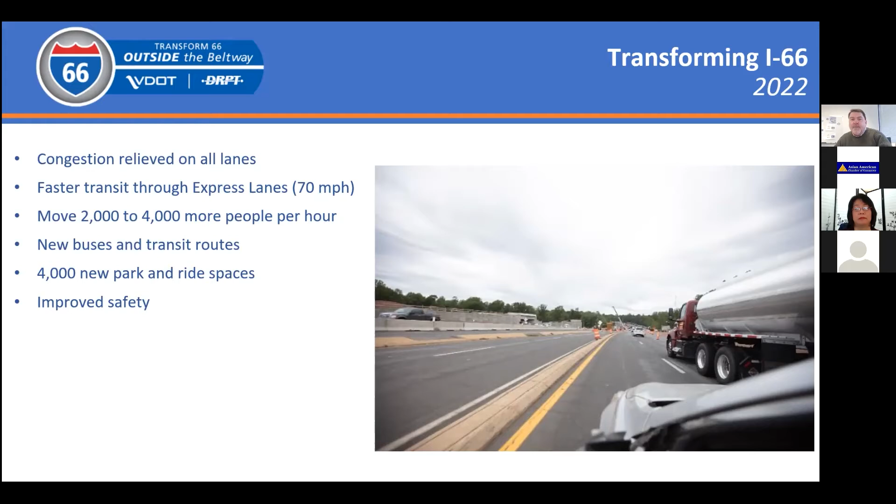Our project, to drill down a little more specifically, we are constructing 2 express lanes in each direction from Route 29 in Gainesville all the way to the Capitol Beltway. When those express lanes open late next year, anybody carpooling, or what we call HOV3, meaning 3 or more people in the car, and buses and transit will travel for free.

Those who are not HOV using the express lanes will pay a toll, and those tolls are based on congestion so we can keep the traffic flowing. If you're familiar with the express lanes on the 495, the Beltway, or on I-395 or I-95, it's very similar in terms of how the tolling will be placed.

There will also be 3 regular lanes in each direction with no tolls, and there are certain places where there will be connections from ramp to ramp between interchanges, meaning that we'll be reducing the amount of times cars need to switch lanes to get from point A to point B.

And there are safety improvements going on at many of the interchanges. For example, improvements in some of the turning radiuses at interchanges to make getting on and off the highway safer.

There's also a lot of new transit service that's being planned as part of the project. So OmniRide, which is the Prince William County transit service, is adding more routes that'll be accessing those new park and ride facilities out in Gainesville and Manassas.

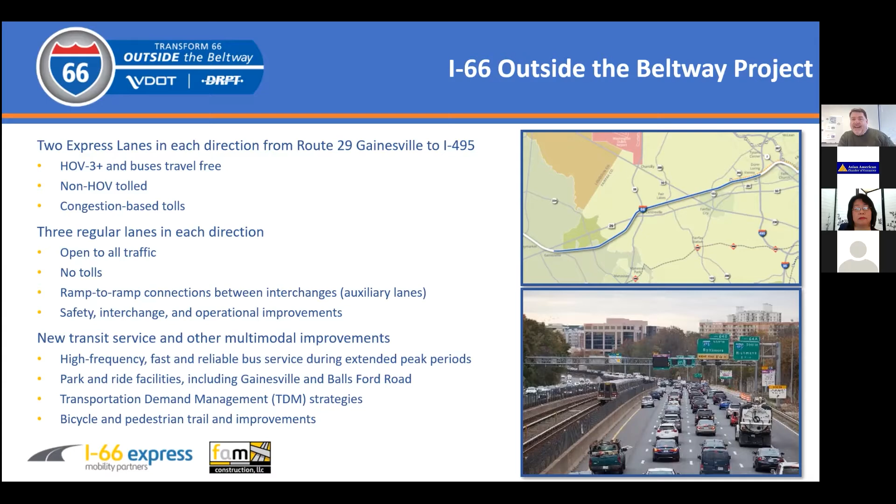And we are building 11 miles of bicycle and pedestrian trail, which we call a shared use path, that is connecting to existing and future trails in Fairfax and Prince William County. So really giving people more choices for them to get from one place to another. We can go to the next slide.

So some people might ask, who is I-66 Express Mobility Partners? We are VDOT's partner on this project. A public-private partnership is where private investment is able to address a public need. So in this case, the project is being delivered at no cost or no taxpayer cost to the Commonwealth of Virginia, but providing this significant improvement, which will relieve traffic congestion.

Overall, the project is worth about $3.5 billion. 2.3 billion of that is for the actual construction of the highway. And as I've mentioned before, transit will be expanding, so toll revenue is also funding the expansion of transit options for people over the lifetime of the contract.

And when we broke ground on the project in 2017, we provided just under 600 million to VDOT and Northern Virginia to address other transportation needs along the I-66 corridor. Our view with that investment was the more we can improve and relieve congestion adjacent to I-66, the better I-66 will perform. So Fairfax County and Prince William County are undertaking projects right now with those funds.

Things like expand the Balls Ford Road corridor in Manassas. Fairfax County just broke ground on a new parking garage at Monument Drive. VRE is using some of those funds to enhance and improve the Manassas rail station. OmniRide, the transit service in Prince William County, used their funds to build a new Western maintenance facility to better serve the commuters along I-66.

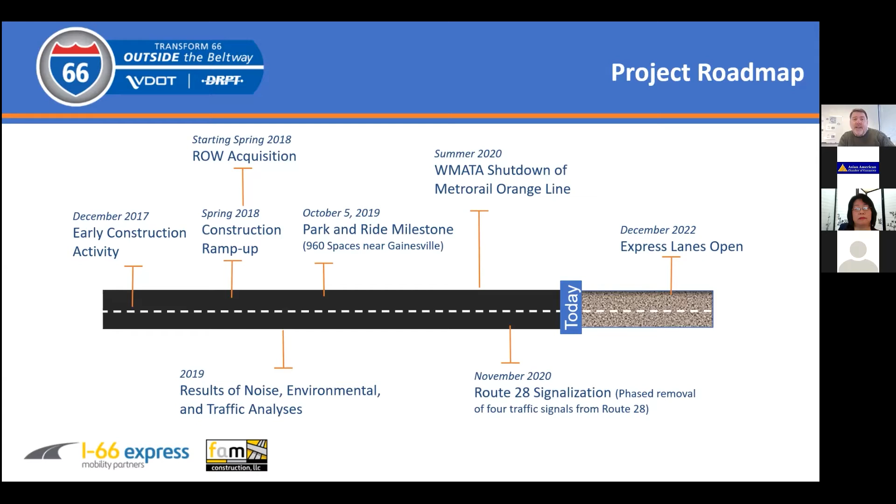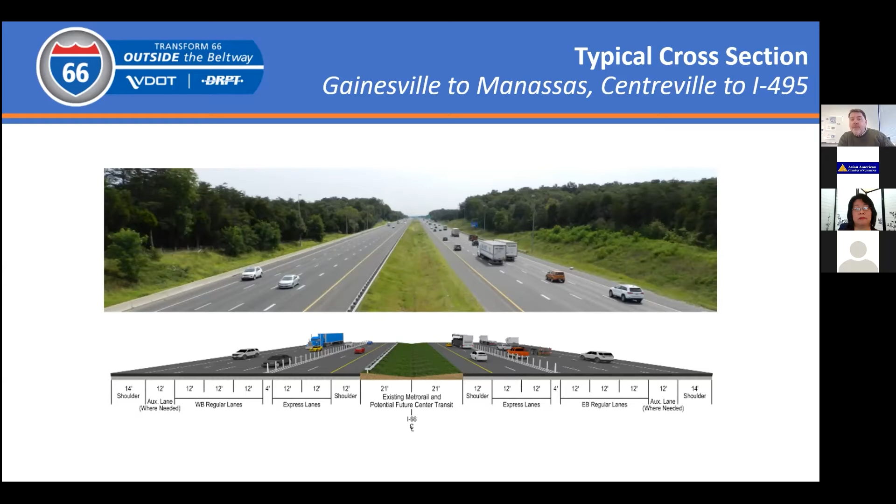In the area from Manassas to Centreville, you'll see there is not a median reserved because we're space constrained there. But in the future, if transit does expand out west, we would have to re-engineer this section of the highway to accommodate whatever transit might take place.

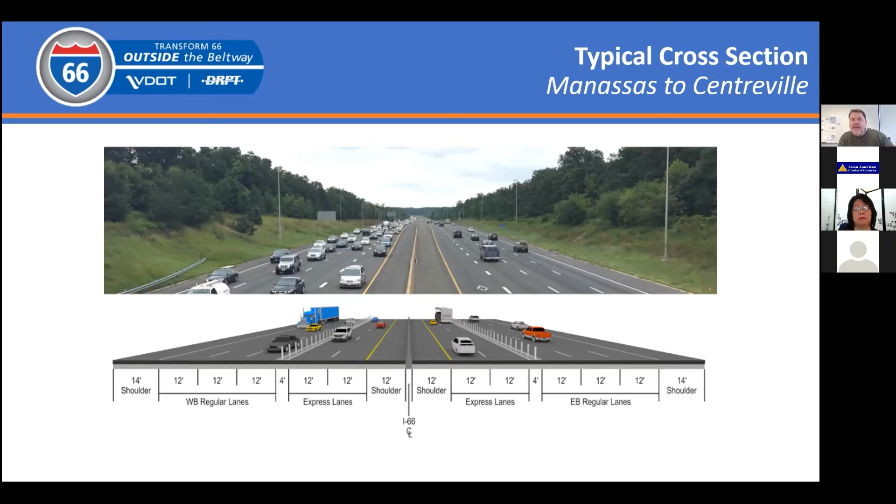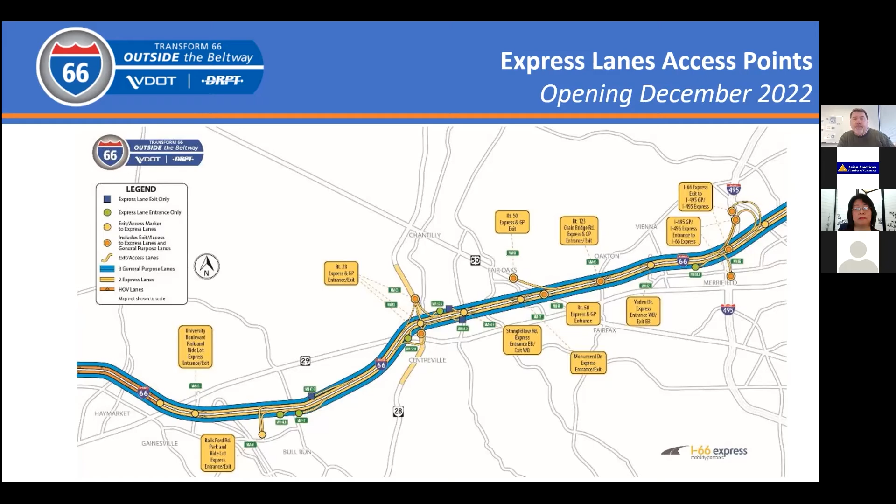So how do express lanes work? I don't want to take for granted that some of you are probably already familiar, but for those of you who might just exclusively be in Maryland or points north or south, express lanes are basically a highway inside of a highway, designed to move more people. For example, the express lanes on I-95 actually move more people than the general purpose lanes when you add up how many people are carpooling or taking buses or van pools. So the idea is to use this strategy called express lanes to move more people.

An E-ZPass or an E-ZPass Flex transponder is required to use the express lanes. There's no cash tolling. For those of you who aren't familiar, E-ZPass Flex is how you can declare that your car has 3 or more people in it, so you would not have to pay a toll in that instance. We rely on everybody being good citizens and not trying to say they're carpooling when they're not, because we'll find out who you are. As I mentioned before, there's dedicated access and exit points to the express lanes, and how tolling works is we use the term dynamic—the tolls are actually set by an algorithm that's tied to traffic flow.

So it might not seem intuitive, but when you see the tolls rising, that means capacity on the lanes is getting to a point where the travel speeds might be jeopardized. So you would see the tolls increase in that type of situation, which helps maintain that traffic flow.

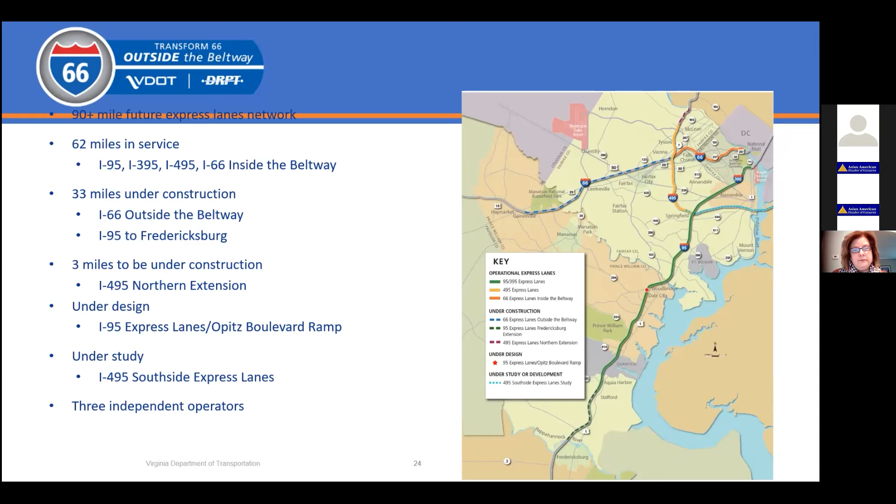Our 495 Northern Extension Express Lanes project, we refer to that as 495 Next. That is approximately $442 million project that is underway. We kicked off environmental analysis and traffic studies in that back in 2018. We're over 3 years into that, and we have completed our environmental phase of that work, and we're in the final stages of our procurement phase. We expect construction to begin in earnest in 2022. We do have some early construction works happening now, basically some exploratory type work, so that the contractors can get out there and do survey work and know what they're dealing with.

It's a 3-mile extension, or about 2.5 miles on actual 495 itself. Again, it goes from where the lanes currently end near the Dulles Toll Road interchange to past the GW Parkway in the vicinity of the American Legion Bridge. We expect this 3-mile extension to be done in 2025. This is a public-private partnership that we are working on with Transurban, who is the operator of the 495 express lanes. They went through a procurement process with us, and this is considered to be a concessionaire enhancement to their existing 495 express lanes network.

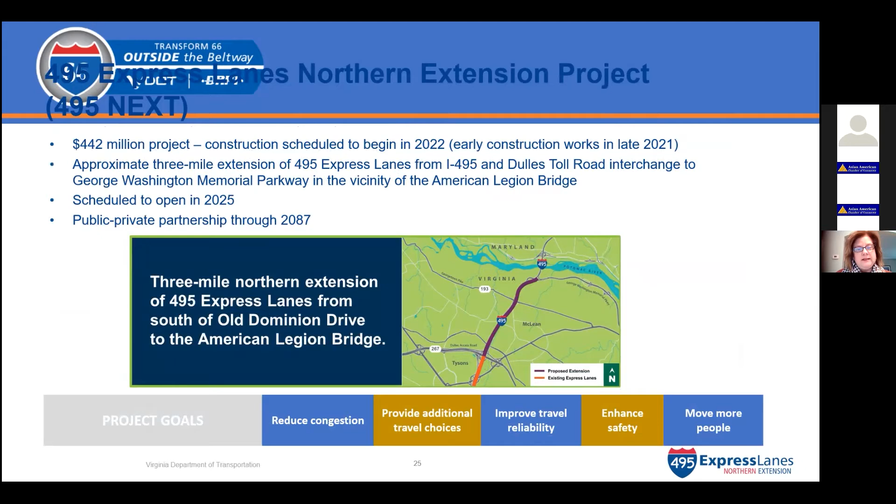The alignment of this portion of express lanes will look just as it does today on 495. We'll be building 2 extra lanes on the inner portion of 495. It'll be separated from the regular or general purpose lanes on 495 by the bollards that you see in the picture. So again, there will be 4 lanes total, 4 new express lanes total, 2 on each side.

The lanes will be free as they are today for vehicles with 3 or more people in them—buses, anyone carpooling that meets the HOV requirement of 3 or more people. Anyone with fewer than 3 people can choose to be on the lanes by paying a toll. On this facility, currently trucks with 3 or more axles are not permitted to travel on the 495 express lanes.

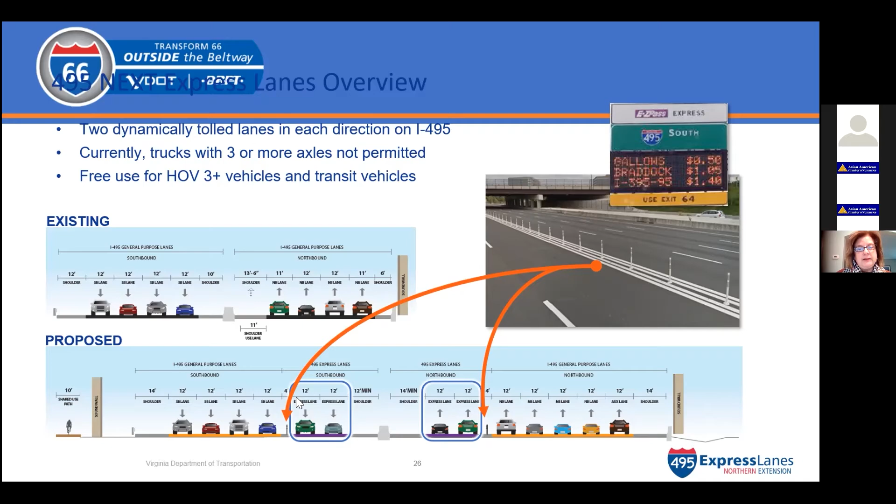There are other project benefits that we are gaining from this extension project. It includes improving and rebuilding about 7 new bridges across the Beltway and at the various interchanges within the project corridor. We'll be adding new bike and pedestrian trails, including a parallel trail to 495, as well as new trails on the crossings across 495.

We'll be replacing existing noise walls and constructing a new noise wall as part of the project. And we'll be providing and enhancing stormwater management facilities in that portion of 495. We'll also be doing stream restoration and stabilization work.

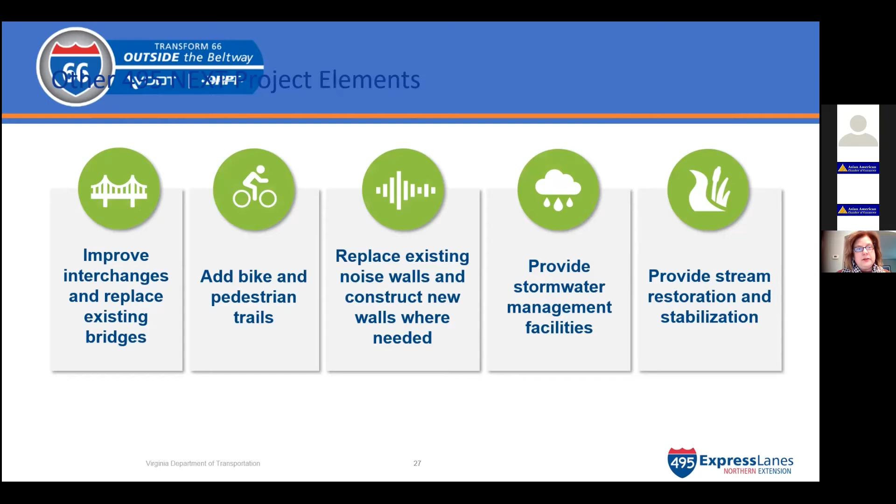Our private partner on this project has made a commitment to provide approximately $1.4 million to Fairfax County for restoring streams at Scott's Run. So that's a significant commitment to improving the environment as part of this project.

They had to go through a process where they had to provide responses and a proposal meeting our specific requirements, technical and financial requirements on this project. That process has taken place. We reached what we call commercial close, which is essentially we've finalized our negotiations with Transurban, and we have a final project agreement. We reached that milestone in fall of 2021.

We expect Transurban to reach financial close in early 2022. Our environmental process has concluded. We received a finding of no significant impact from the Federal Highway Administration. Virginia's Commonwealth Transportation Board has given their approval for us to proceed with this project. And our partner, Transurban, has procured a design build contractor that will start building the project.

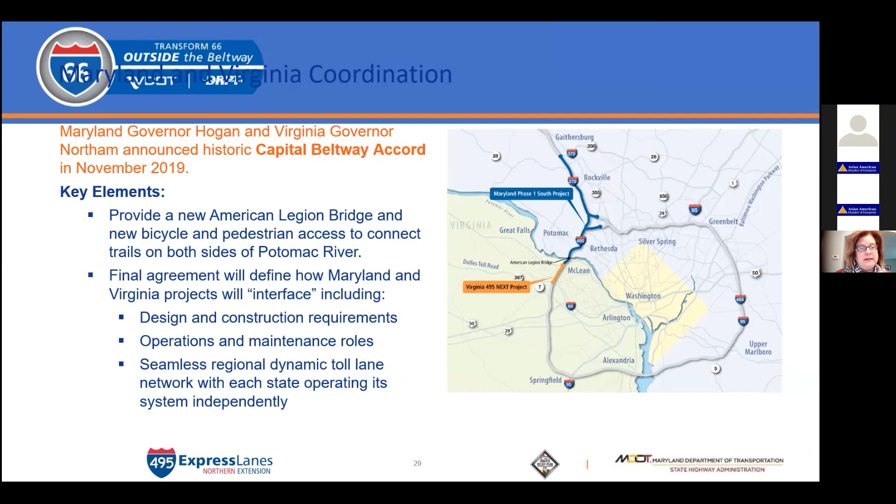Both of our projects, our initiatives on both sides of the bridge, share a commitment to enhancing transit and providing transit options as a major benefit of the express lanes. As Chris indicated in his remarks, and what we've expressed a couple times through the last few slides, express lanes are designed to provide drivers a more reliable and a faster trip than what they would currently experience on the regular lanes.

There's major enhancement for people wanting to carpool. It's very attractive to carpoolers or to buses because you will finally have a more reliable trip, which is something that you don't have today. The lanes are free for people that are traveling in carpools with 3 or more people. Buses also travel the lanes for free. So the express lanes, just by their very own nature, create a transit environment, and that is very attractive to transit. They create new opportunities and greater incentives for people to want to join carpools, for buses, and so forth.

Maryland and Virginia, our respective transit organizations, have been working on a study where they've looked at what the transit needs are in the corridor, and they've come up with recommendations. And the states are working very hard and are committed to trying to implement as many of those transit recommendations as possible. Next slide.

I believe that's annually, but I need to confirm that. I know there's an initial commitment of 2.2 million when construction begins—no, I believe it is annually, and that money would go toward operating those buses. We are hoping that bus service can begin during the construction phase as a traffic mitigation program, to help people not have to be stuck in construction and give them the option to start choosing a bus service or trying it out before the express lanes are open. And that's what we're working on currently.

Next slide. This is our timeline showing the coordination and overlap of both the VDOT 495 Next project and Maryland's Express Lanes Initiative, showing where we are in late fall 2021. On the Maryland side, they're in the final stages of their environmental study, having completed an environmental impact study, public hearings, and multiple public information meetings. They expect the final environmental impact statement and decision from the Federal Highway Administration in spring of 2022. Their decision-making authority, the Maryland Board of Public Works, is expected to make a decision on procurement—also structured as a public-private partnership—in summer of 2022, with potential financial close around this time next year.